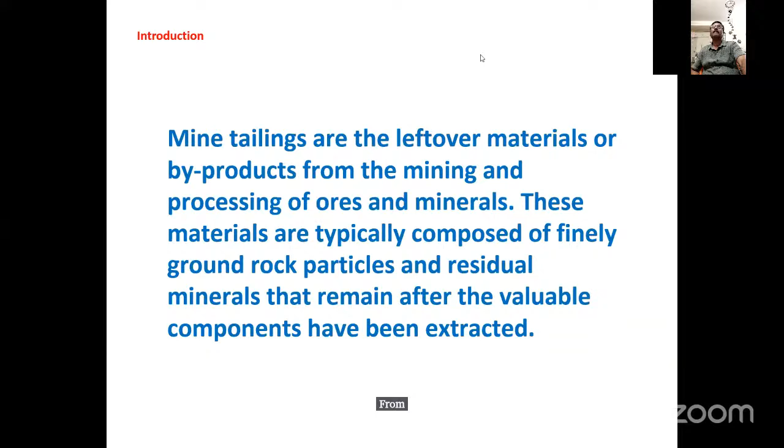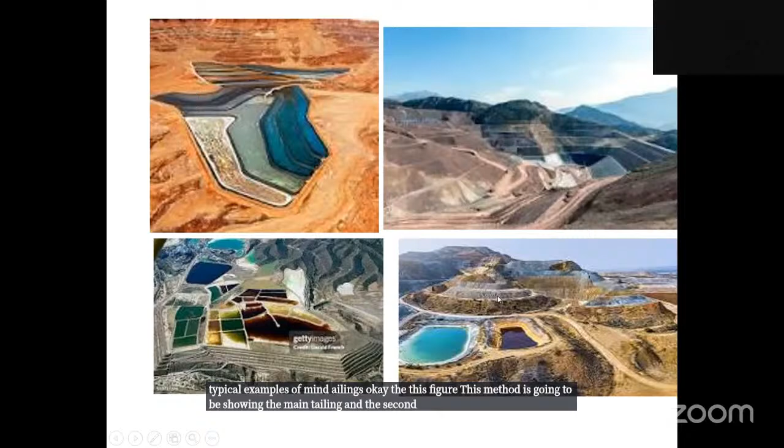Now here, what is the geotechnical importance of mine tailings? These mine tailings are once again a combination of different rocks or different soil particles. So when we are dumping this mine tailing at a particular place, we have to ensure the stability, safety, and environmental sustainability, and we have to maintain proper storage facilities. It is the duty of a geotechnical engineer.

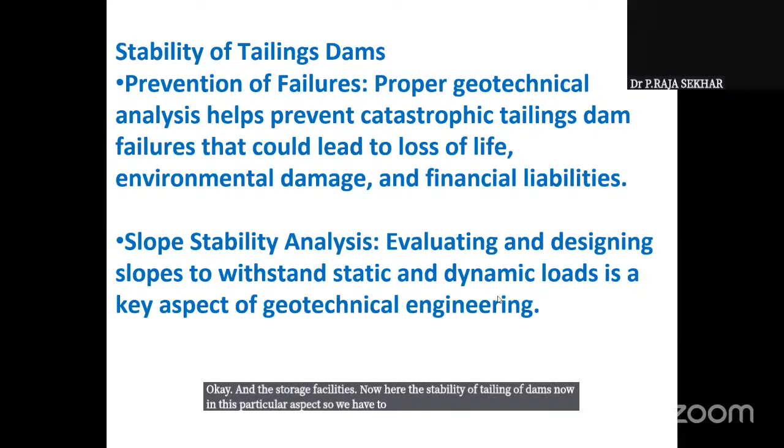So what is the duty of the geotechnical engineer? We have to ensure that the mine tailings should be stable, safe, and environmentally sustainable, with storage facilities. Now here, the stability of tailing dams. In this aspect, we have to prevent failures, analyze the slope stability, then control the seepage and drainage management. Means we have to control the pore water pressure, that is reducing pore water pressure within the tailing material, and we have to provide efficient drainage systems.

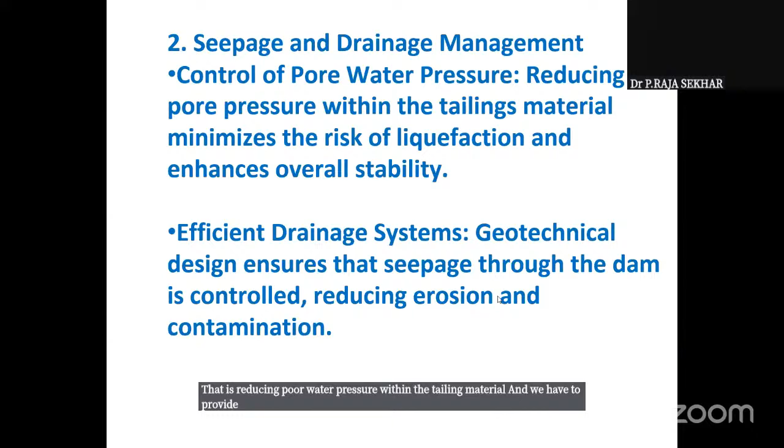And the third point, characterization of tailing material. Here the geotechnical studies evaluate the mechanical properties of tailings, which play a very important role. So what are mechanical properties in soil? They are index properties and engineering properties. Coming to index properties: water content, specific gravity of mine tailing material, and Atterberg limits. And we have to classify the tailing material, is it well graded or poorly graded, and know its density. This comes under index properties.

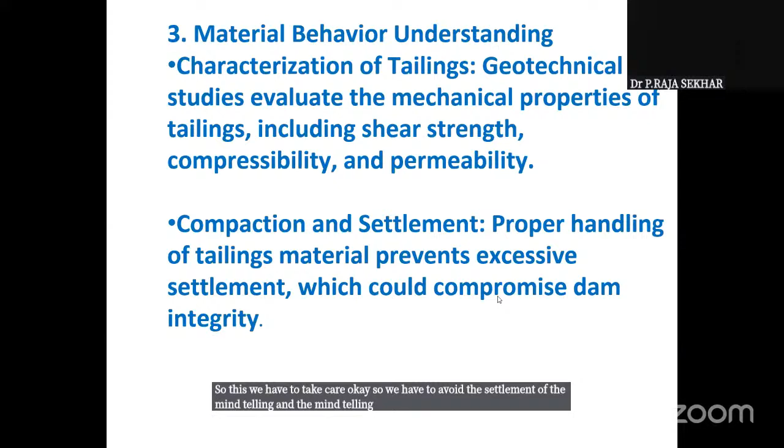And what are the engineering properties? They include shear strength, compressibility, and permeability. And one more is compaction and settlement. Proper handling of tailing material prevents excessive settlement, which could compromise the dam integrity. So this we have to take care. We have to avoid the settlement of the mine tailing, and the material should be properly compacted. And the risk mitigation, this is also very important.

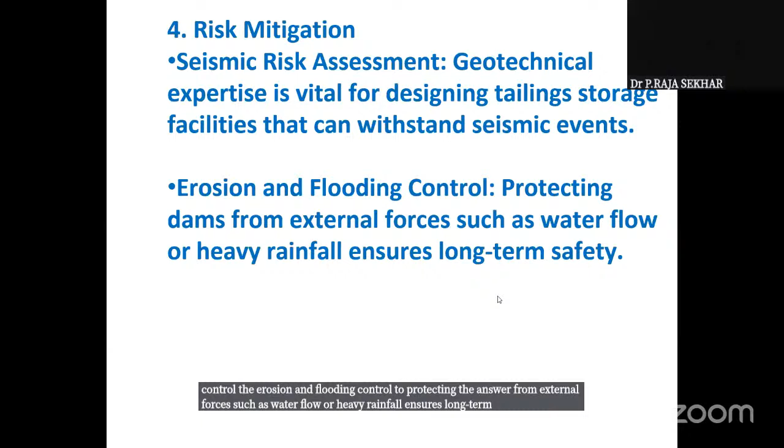Geotechnical expertise is vital for designing tailing storage facilities that can withstand seismic events. And erosion and flooding control, protecting dams from external forces such as water flow or heavy rainfall, ensures long term safety. So this comes under risk mitigation. And the main important thing is environmental protection. This will play a role in safety and stability of mine tailing material.

So what is environmental protection? Preventing contamination. What is the contamination here? The material coming out should not flow outside that particular boundary. If that material is contaminated, the entire surrounding area is going to be contaminated. So for preventing contamination, we use geotechnical barriers and liners, which can prevent leachate from polluting groundwater.

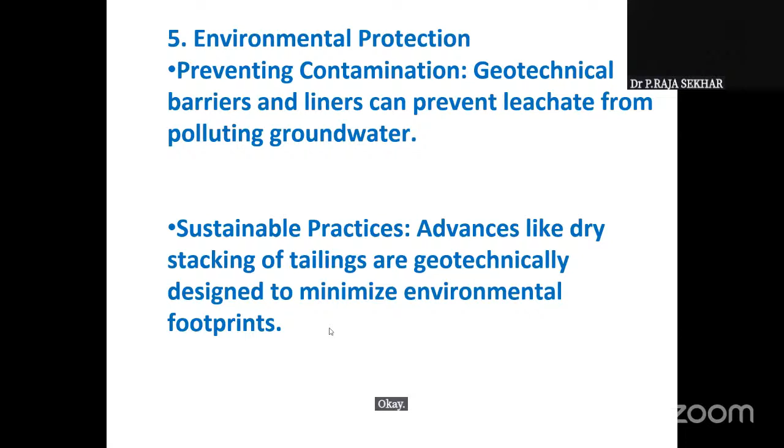And we have to follow sustainable practices, such as advances like dry stacking of tailings, which are geotechnically designed to minimize environmental footprints. This comes under environmental protection. The next point, characteristics of mine tailings. Mine tailings consist of finely ground rock and mineral waste from the extraction of metals or minerals. It is a fine ground material from the extraction of metals or minerals. They often contain residual metals, sulfides, and other chemicals used in the mining process.

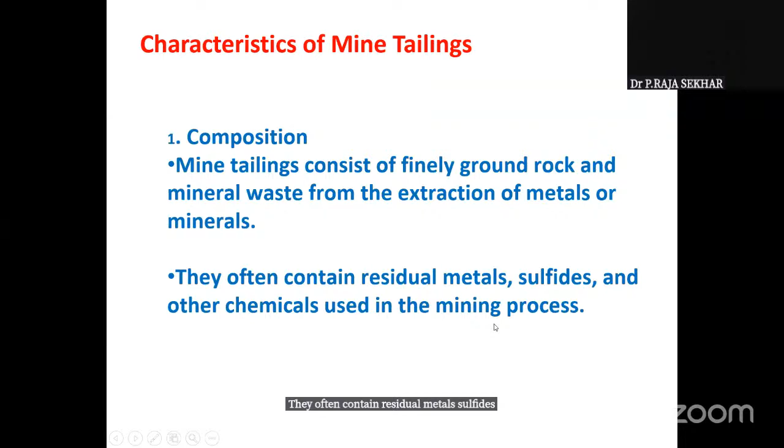Now this diagram indicates the representation of mine tailing material. There are four diagrams. The first diagram shows that we are taking some mine tailing material and keeping it in a container. In this container we can show some solids. The round shaped particles are mine tailings, and in between two round shaped particles, these are called solids.

So between two solids there is a gap. This gap is called voids. Sometimes these voids are filled with air, water, and solids. The first diagram indicates a tailing material, and the second diagram indicates a three-phase diagram.

Three-phase diagram. So the tailing material we are dividing into solids and the voids. The voids between the two solids are sometimes filled with water and air. So this is partially saturated tailing material. Coming to the third diagram, if there is heavy rain for 2-3 days, what will happen? All these voids are filled with water, so the partially saturated tailing material will convert into fully saturated material.

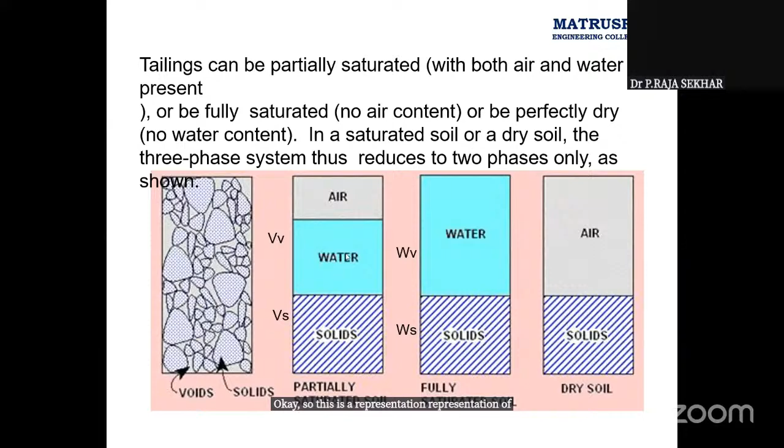Mine tailing material. The first diagram indicates we are taking the tailing material in a container, the second diagram we are separating into a three-phase diagram, the third diagram indicates all the voids are filled with water, and the fourth diagram represents the voids filled with air. So that is a dry state. It is a fully saturated state. It is a partially saturated state. So this is a representation of any material.

Before dumping or storing this mine tailing material, we have to see some index properties. The index properties are water content, specific gravity, what type of soil, the Atterberg limits, and density. One of the very important index properties is the particle size.

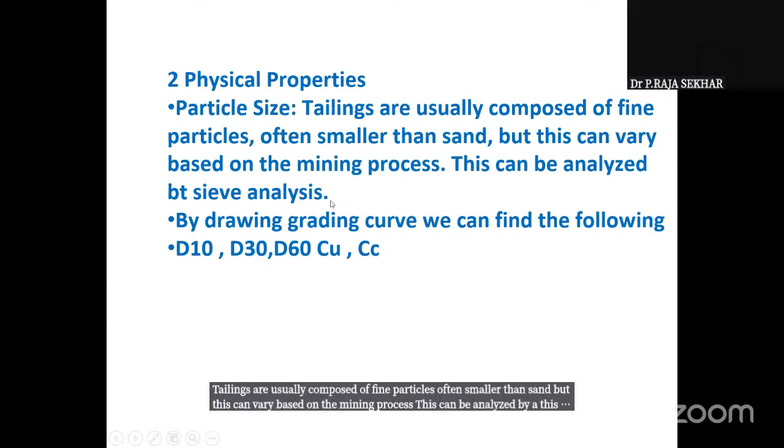Tailings are usually composed of fine particles, often smaller than sand, but this can vary based on the mining process. This can be analyzed by sieve analysis. What is sieve analysis? We take mine tailing material through different sieves, sieve it, and find the particle size and sieve size. On the x-axis we draw the particle size, and on the y-axis the percentage finer.

So we will get a curve. This curve is a grading curve, and it indicates what type of tailing material it is. If this curve is S-shaped, it is called well graded tailing material. If we get a straight line, it is called poorly graded tailing material. From this grading curve we can find D10, D30, D60.

So what is D60? D60 is the particle size at 60% finer, D30 is the diameter of the particle at 30% finer, and D10 is the diameter of the particle at 10% finer. Here the D10 is called effective size. And we calculate the uniformity coefficient, Cu, which is the ratio of D60 divided by D10.

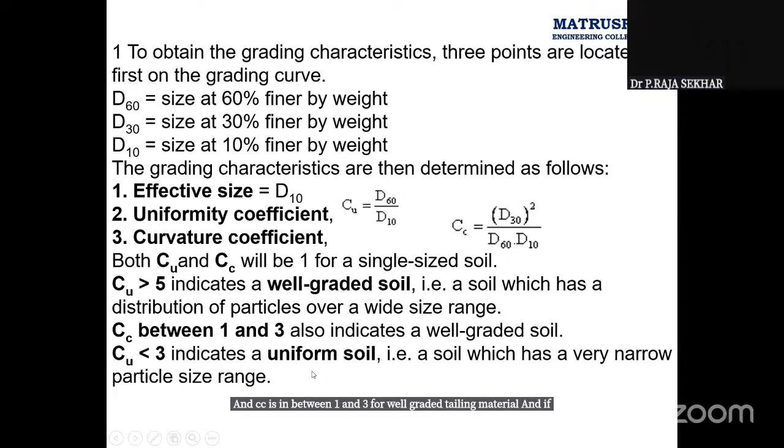If Cu is greater than 5, it indicates well graded tailing material, and Cc is in between 1 and 3 for well graded tailing material, and if Cu is less than 3 it indicates uniform tailing material. So like this we can grade. So before dumping this tailing material, we can classify what type of tailing material it is. Is it well graded or is it poorly graded material?

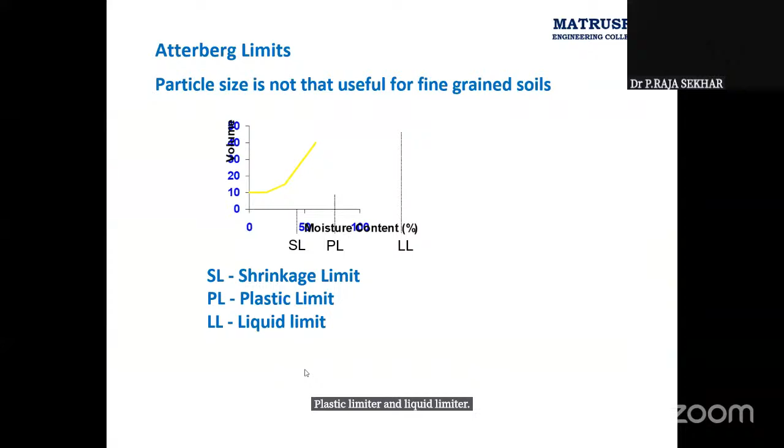Then another index property is the Atterberg limits. The Atterberg limits are nothing but shrinkage limit, plastic limit, and liquid limit. This particular diagram indicates the consistency of the tailing material. Initially the tailing material is solid. If I add some water, this solid will become semi-solid. If I add some more water, this semi-solid will become plastic. At this plastic state, we can mold the material into any shape.

Beyond this particular water content, what will happen? The plastic state will become liquid state. So these are called consistency limits or Atterberg limits of a mine tailing material. Now what is the WS? The water content between solids and semi-solids is the shrinkage limit, the water content between the semi-solid and plastic state is called plastic limit, and the water content between the plastic and liquid state is called liquid limit. So these are the consistency limits.

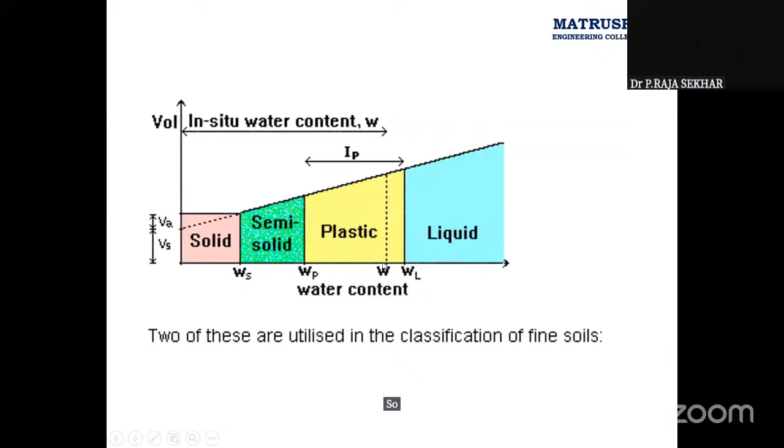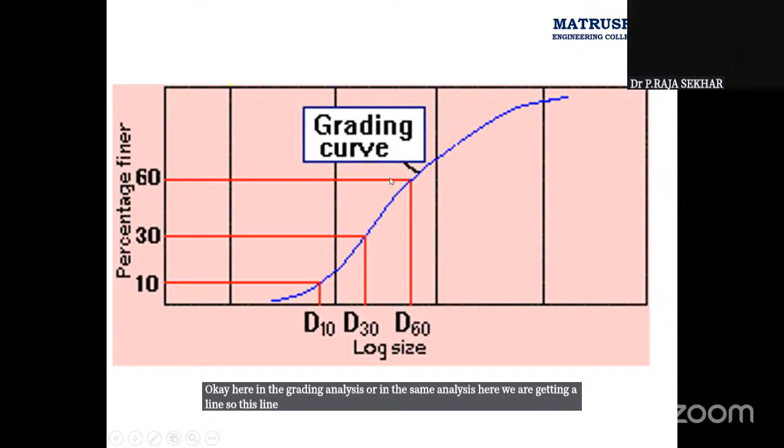And there is one line. This line is called the A line. Previously, in the grading analysis or sieve analysis, we got a line called the grading curve. Whenever we draw a graph between two variables, we get a line or curve, and every line or curve has its own name. Here the name of this line is A line. Tailing material above the A line is called clay, and below the A line, it is called silt.

In the plasticity chart, there are two vertical lines. This vertical line is at 35%, and this one is at 50%. What is the meaning? If the liquid limit is less than 35, it is indicated with the L symbol, which means low plasticity. If the liquid limit is in between 35 and 50, it is called intermediate. And if the liquid limit is more than 50, it is called high plasticity clay or high plasticity silt. So this plasticity chart is for fine grained tailing material.

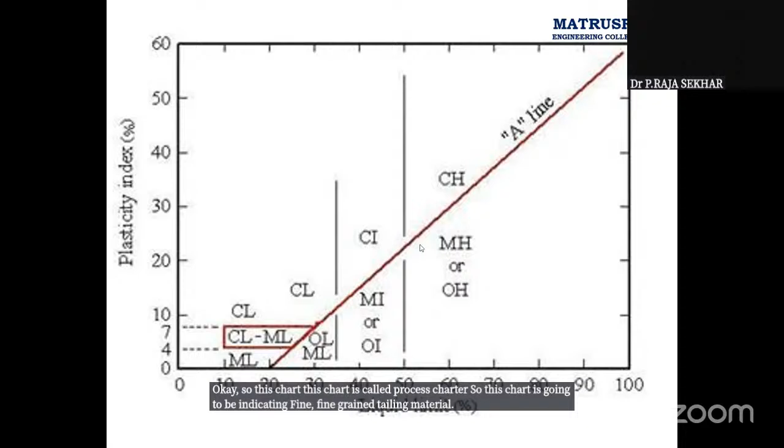Next, seepage and permeability. This is a very important concept when we are storing or dumping the tailing material. Before dumping the tailing material, we have to calculate the permeability. So what is permeability? Permeability is the property of a tailing material which permits water through its interconnecting voids.

Yes. Somebody is disturbing. Please mute.

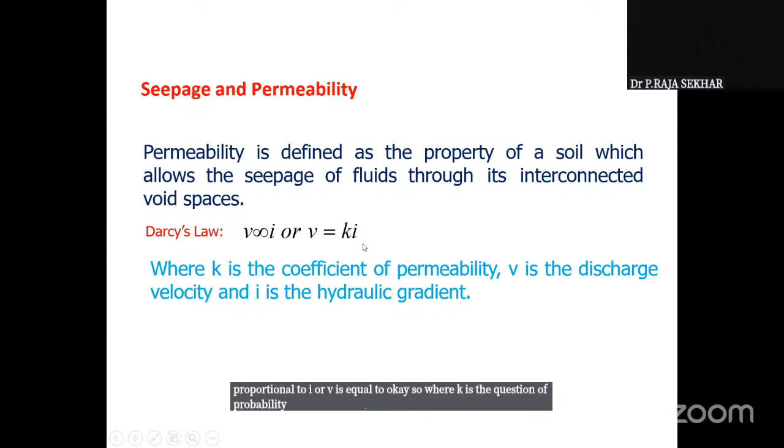Okay, so this is seepage and permeability in tailing material. If the tailing material is granular, this is the permeability. Now it is blocky, and it is a platy type of tailing material. Now what is the difference between permeability and seepage? If you see this blocky or granular material, these are the solids. In between the two solids there are voids, and these voids are sometimes filled with water and air.

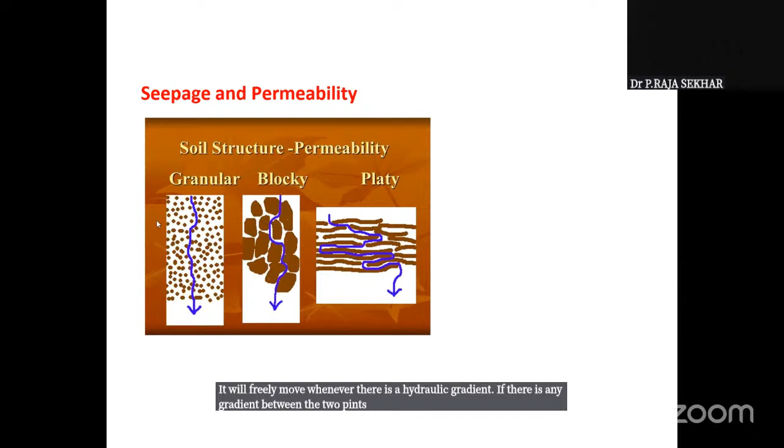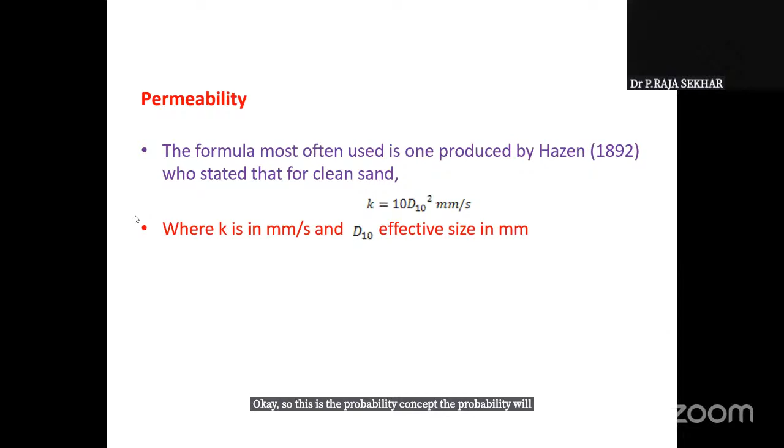When the voids are filled with water, we can classify two types of water in voids: one is held water, second is free water. The held water causes capillarity, and the free water causes seepage. Free water means it will freely move whenever there is a hydraulic gradient. If there is any gradient between two points, that water will freely move from one point to another. So this is the permeability concept. Permeability plays a very important role when we are storing the tailing material.

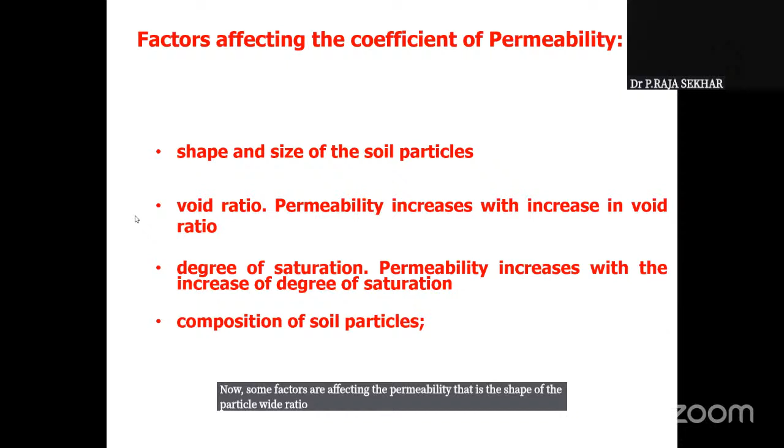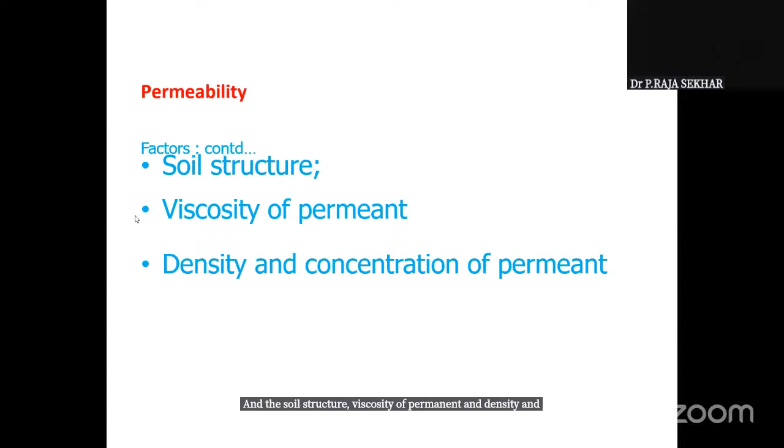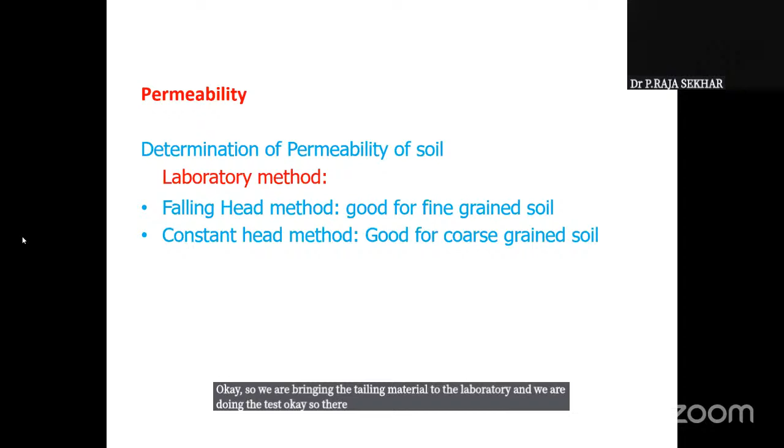Now, some factors affect the permeability: the shape of the particle, void ratio, degree of saturation, composition of soil particles, soil structure, viscosity of permeant, and density and concentration of permeant. One more interesting topic is how to calculate this permeability. It is calculated with the falling head method and the constant head method. We bring the tailing material to the laboratory and do the test. So there are two methods: one is the falling head method, second is the constant head method.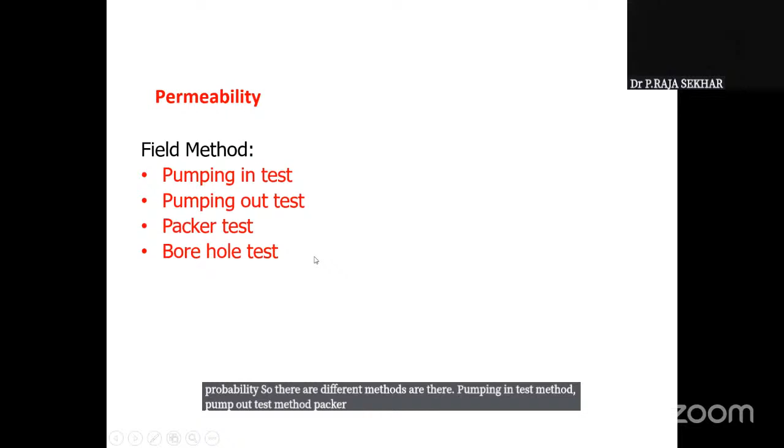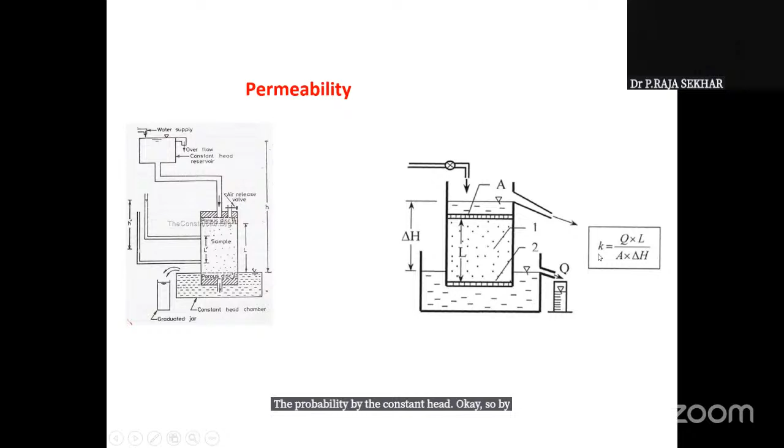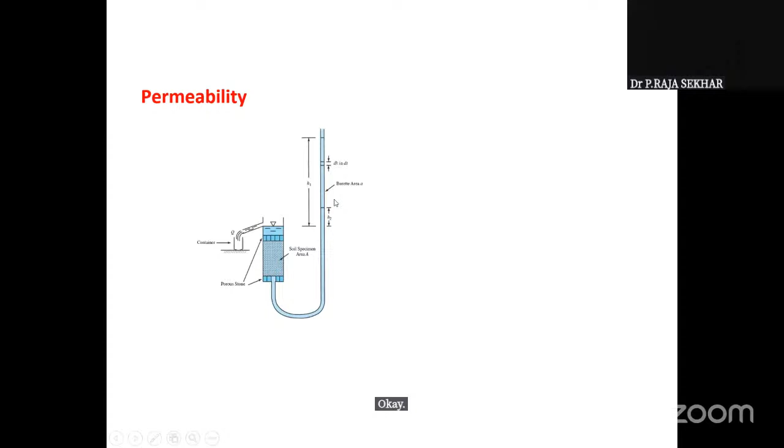In the field also we can measure the permeability. There are different methods: pumping in test, pump out test, packer test, and borehole test method. This diagram indicates the permeability by constant head, where K is equal to QL divided by A delta H. Now this is another method, the variable head method, and here is the formula: K is equal to 2.3 aL divided by At into log H1 divided by H2.

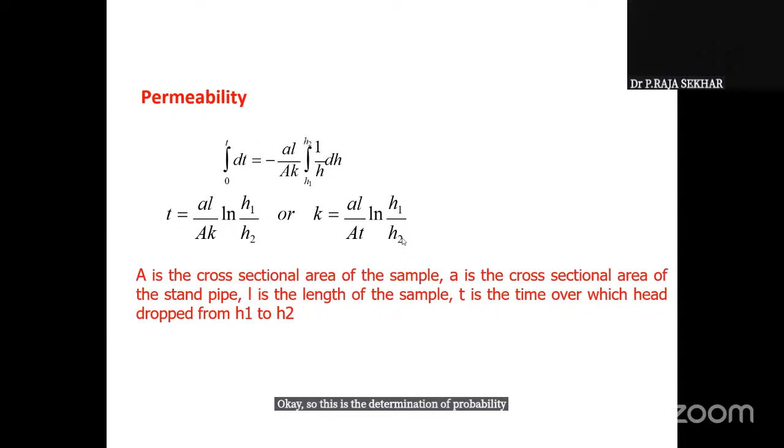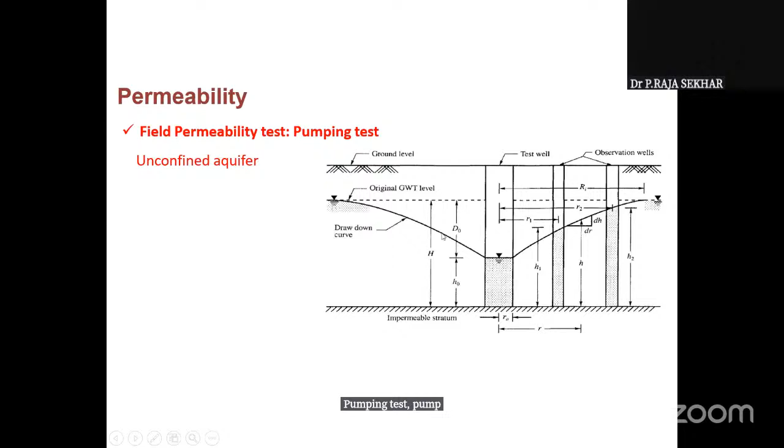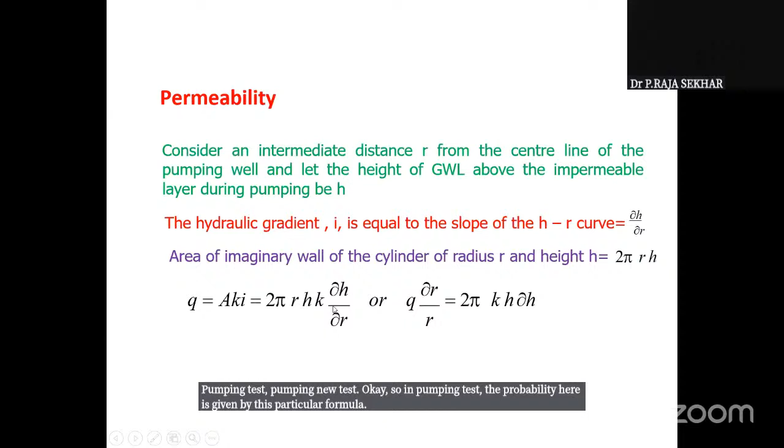So this is the determination of permeability in the lab and in the field. In the field, we can determine the permeability by pumping test, where the permeability is given by this formula. Next, if there is more than one layer of tailing materials, it is called stratified soil. In stratified soil, let us take n different layers, h1, h2, h3 up to hn, with permeability k1 in h1, k2 in h2, and kn in the last layer hn.

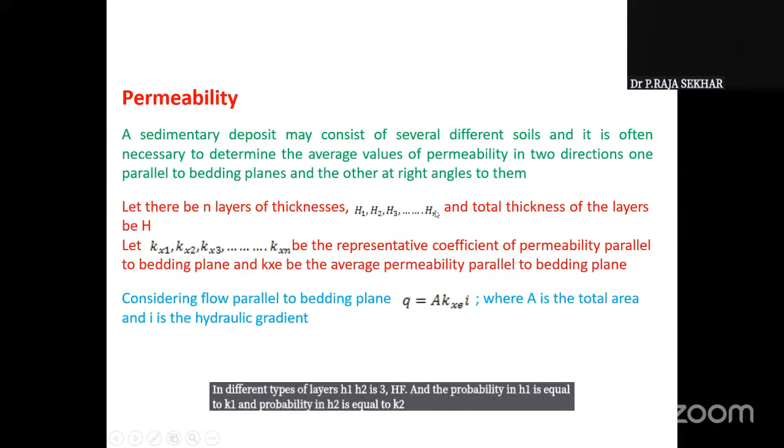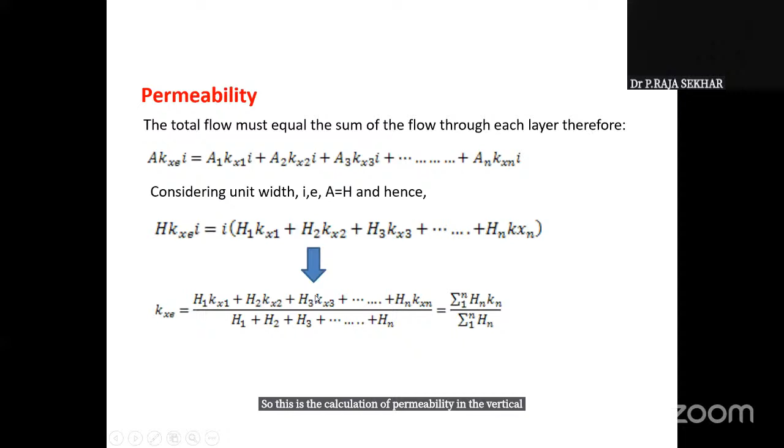And how to calculate the permeability in the vertical direction? This is the calculation of permeability in the horizontal direction, and using this formula we calculate the permeability in the horizontal direction. So this is the main concept of permeability: what it is and how to determine it. Permeability plays a crucial role when we use this tailing material in an embankment or in an earthen dam.

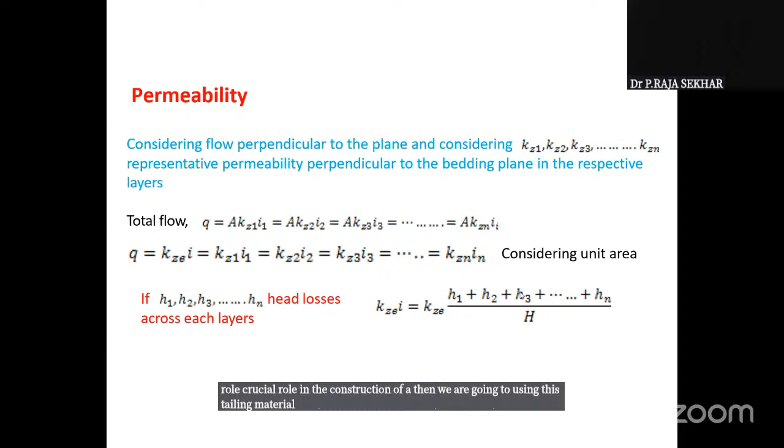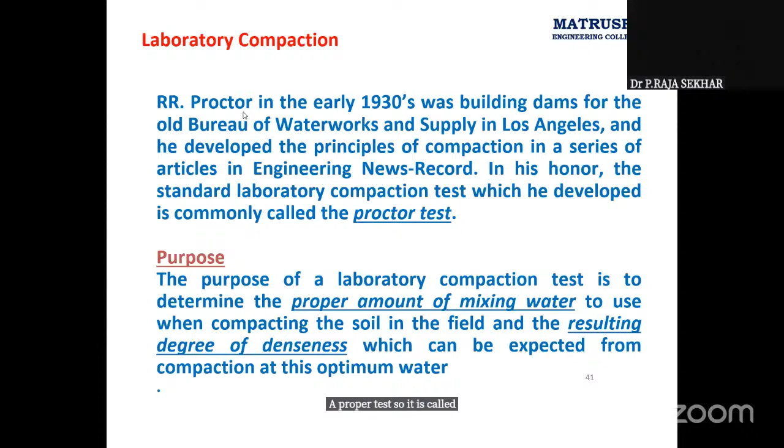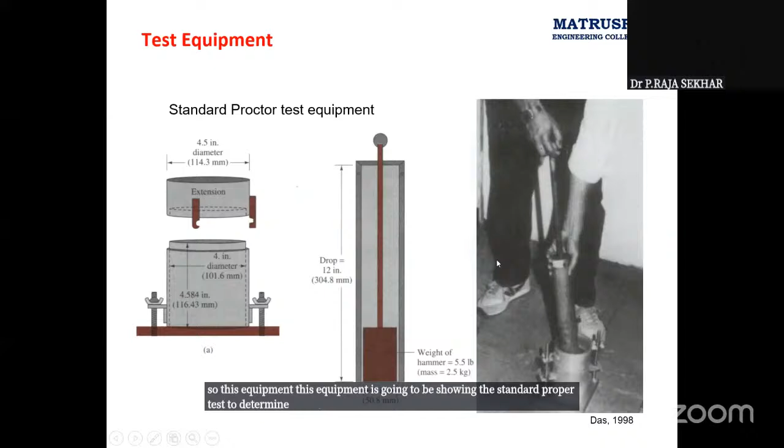So this equipment is going to be showing the standard Proctor test to determine the optimum moisture content and dry density. Now here I will show a curve. After compaction, we are going to be getting this curve. This curve is nothing but the compaction curve. Here the peak point is going to be indicating the maximum dry density, and the corresponding water content is

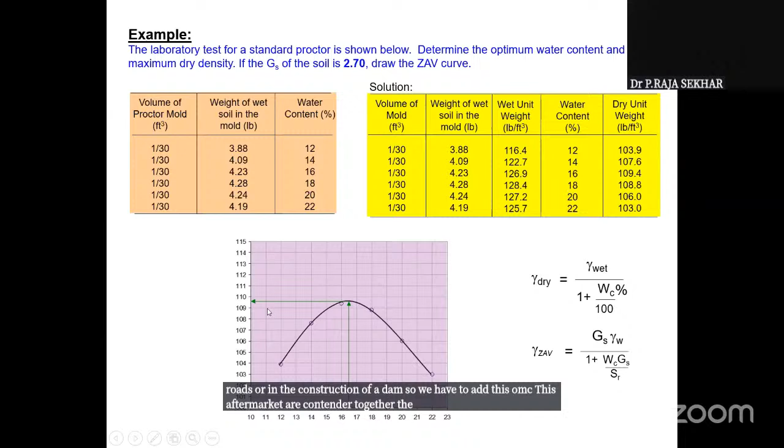called optimum moisture content. So whenever we want to use this tailing material in the construction of roads or in the construction of a dam, we have to add this OMC, this optimum moisture content, to get the maximum dry density. Now this particular diagram is clearly indicating the compaction curve of a tailing material.

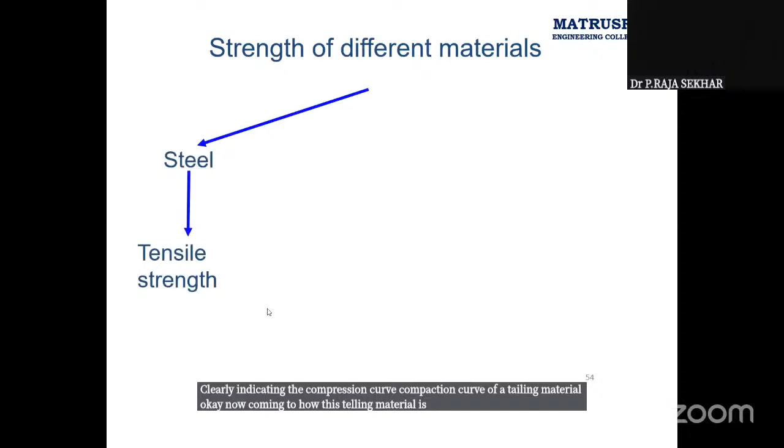Now coming to how this tailing material is getting strength. There is a very important concept here: the strength of different materials. Every material has its own strength. Generally, in the construction of civil engineering structures, we use steel, concrete, and soil or tailing material. Now what is the steel? The steel is very strong in tension, and the steel gets its strength due to tensile strength.

Coming to concrete, the concrete is very strong in compression, so the concrete gets its strength due to compressive strength. But what about tailing material? The tailing material is a complex material, but it is very strong in shear. That is nothing but shear strength. But here we have to avoid the pore water pressure. Due to the presence of pore water pressure, the tailing material or soil material will show a complex behavior.

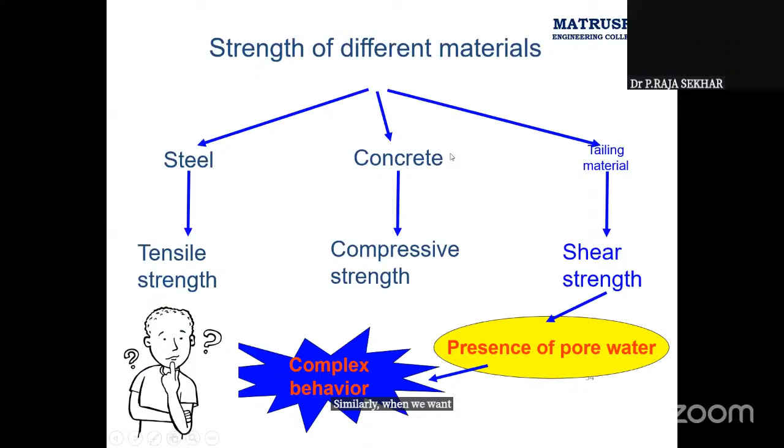Now, how to calculate the strength of any material? Let us take steel. We purchase steel according to its grade, Fe 415 or Fe 500. Fe is nothing but ferrous, and 415 or 500 indicates its strength. Similarly, when we want to mix a concrete, we go for a mix design, M15, M20, M30. What is the M? M is nothing but mix, and the number indicates the strength.

Similarly, coming to shear strength, here we have to find out the shear parameters, that is nothing but c and phi, and the shear parameters will give the bearing capacity of that particular tailing material or soil. Steel gives tensile strength in the form of Fe 415 or Fe 500. Concrete gives its strength in the form of mix design M15, M20, M30. Similarly, the tailing material gets strength due to c and phi, cohesion and friction, which play a very important role in the calculation of bearing capacity.

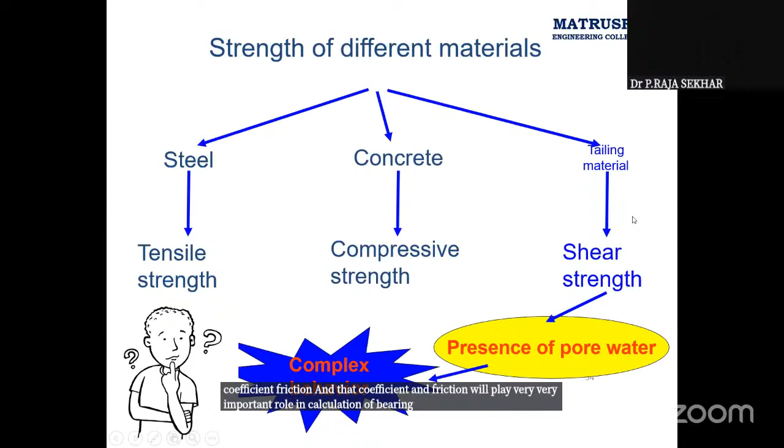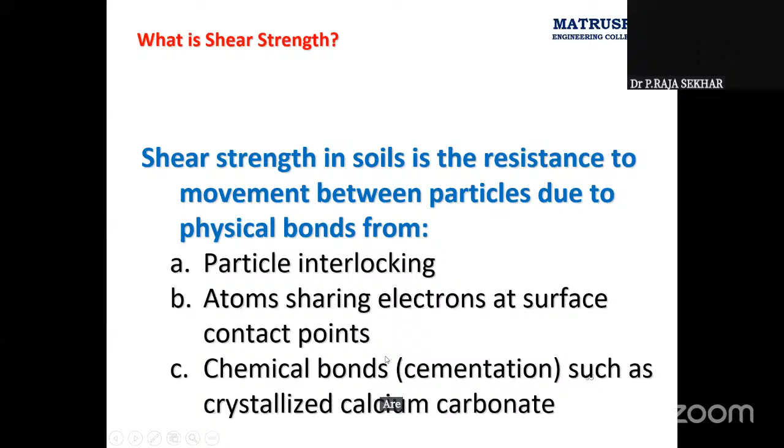Now, what is the shear strength? Shear strength is the resistance to movement between the particles due to physical bonds from particle interlocking, atoms sharing electrons at the surface contact points, or chemical bonds. Now, how will this tailing material fail? The tailing material will fail in shear.

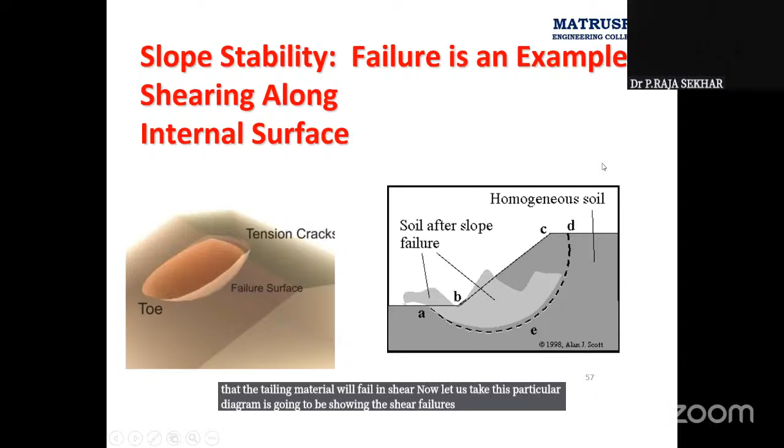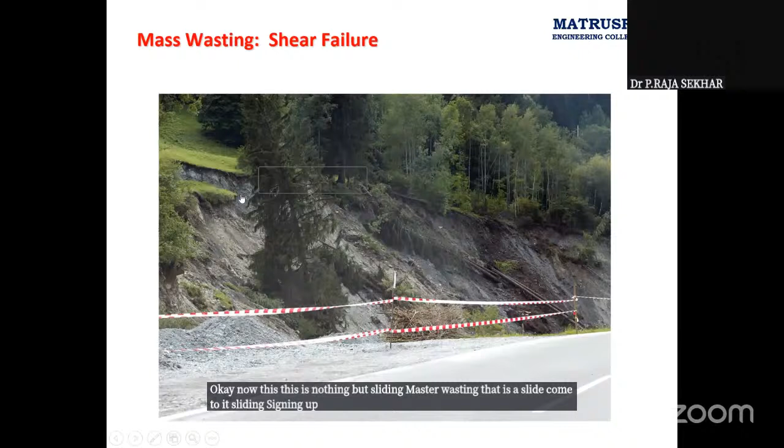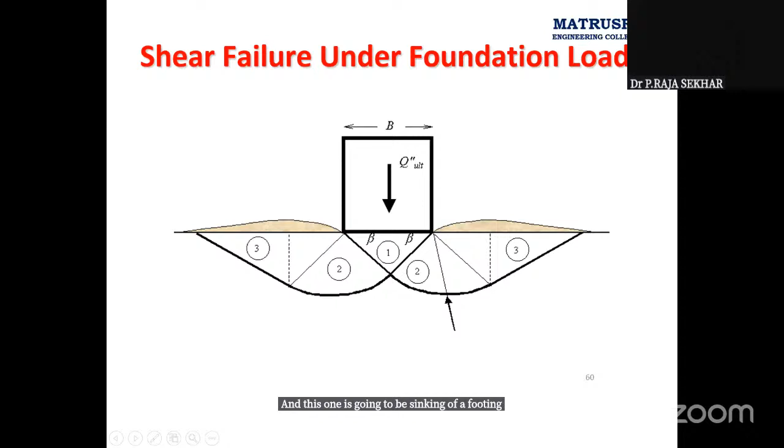This diagram is showing the shear failures of a tailing material. This is a sliding mass wasting, that is, complete sliding of an embankment or a slope due to shear failure. And this one is the sinking of a footing, that is a shear failure under a foundation. See here, this is the sinking of a footing, how this material is failing.

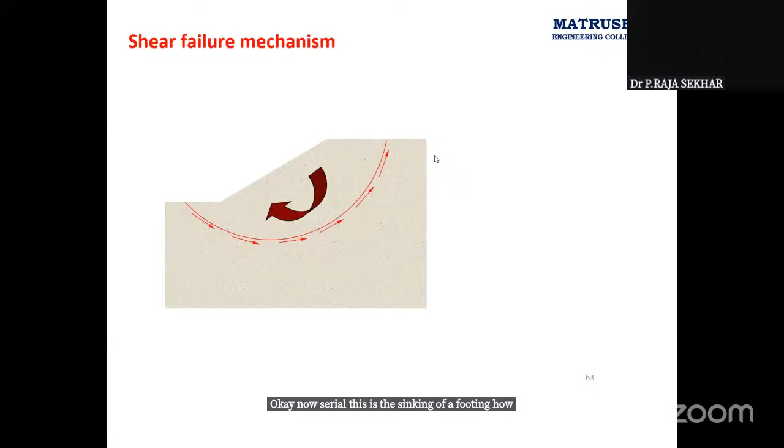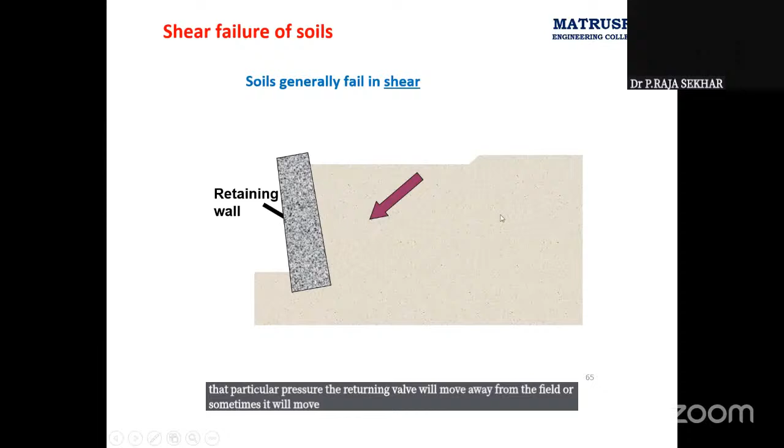Now one more failure is a retaining wall. What is the retaining wall? A retaining wall retains a material, and this material exerts a pressure. Due to that pressure, the retaining wall will move away from the fill, or sometimes it will move towards the fill. At the time of failure, the failure surface develops, and there will be a mobilized shear resistance.

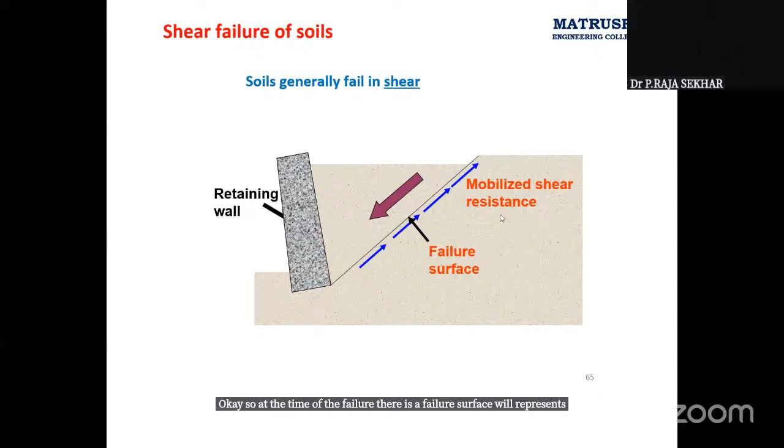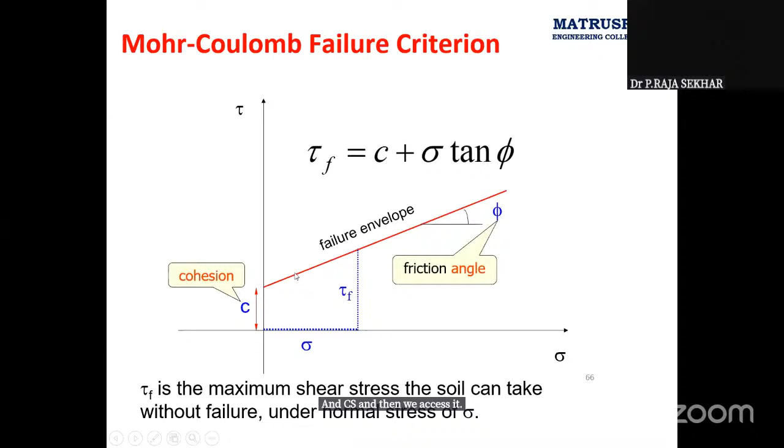And how we are going to be getting this failure criteria in a tailing material: using a Mohr-Coulomb failure criteria. The Mohr-Coulomb failure criteria is given by tau is equal to C plus sigma tan phi. Okay. And here what is the tau? Tau is nothing but shear strength, C is cohesion, and sigma is normal stress. So here we are drawing normal stress on the x-axis and shear strength on the y-axis. If now we are getting a line, this line is called the failure envelope or strength envelope.

Now there are different types of strength envelopes we are getting. If the strength envelope is passing through the origin, it is called cohesionless soil. And if it is parallel to the x-axis, it is called cohesive soil. If this line intersects the y-axis at a particular point, this is called the general case, that is the C-phi soils. Okay. The Mohr-Coulomb failure criteria will give the strength envelope for cohesive soil, cohesionless soil, and C-phi soils.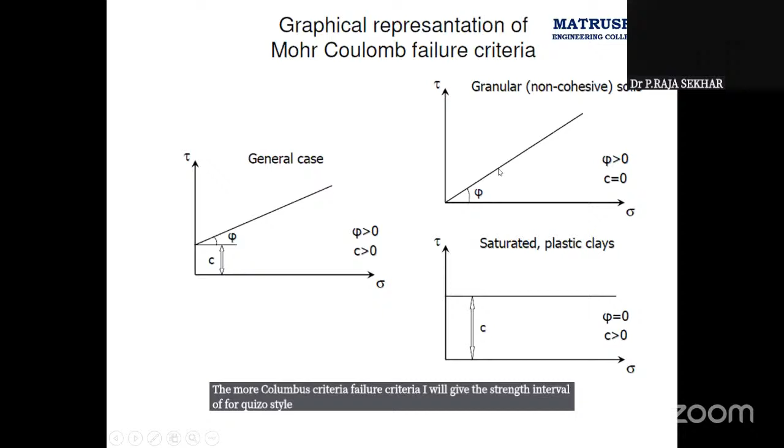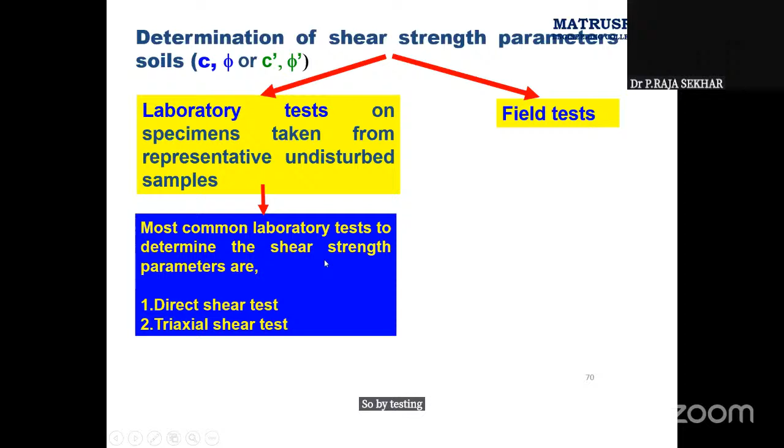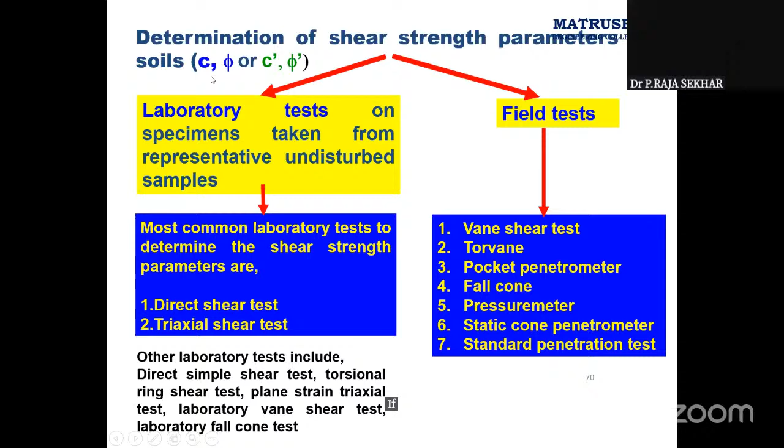Now, the determination of shear parameters is very important. So, how are we going to determine these shear parameters? By testing the tailing material in a lab with the help of a direct shear test or triaxial shear test. And in the field also, we can test by vane shear test, Torvane test, pocket penetrometer, fall cone test, pressure meter, static cone penetration test, and standard penetration test. Using these tests, we can calculate C and phi. If I know the C and phi of any material, I can calculate the bearing capacity.

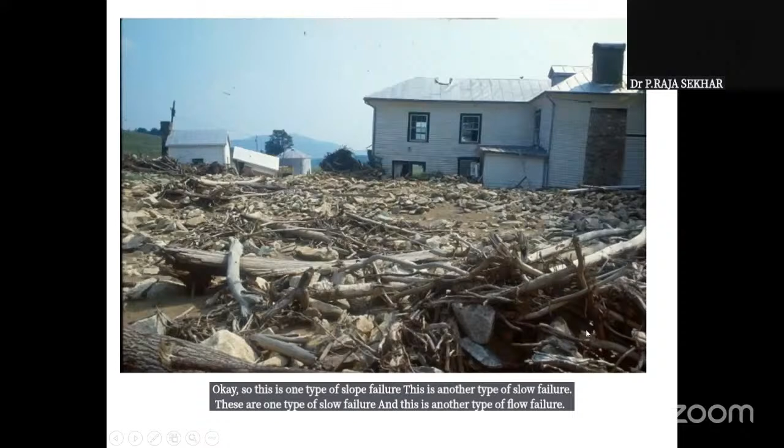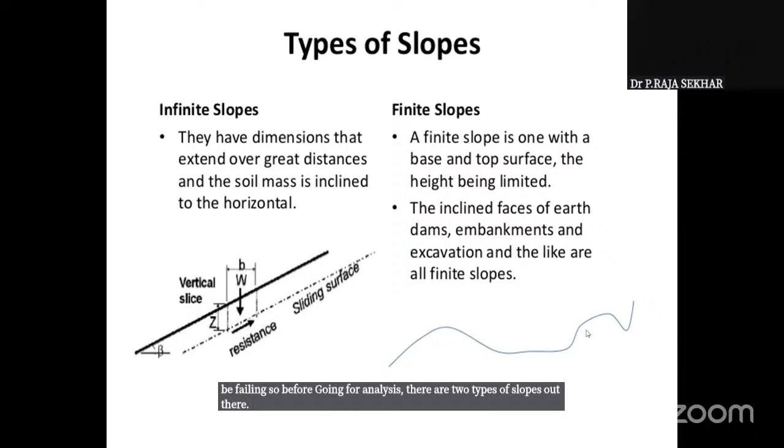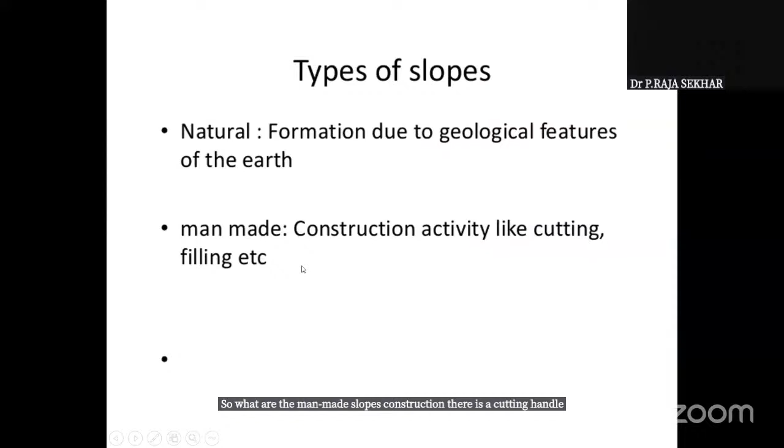Now these are some failure mechanisms, slope sliding mechanisms. This is one type of slope failure, this is another type, and this is also slope failure. Now, how is this slope going to fail? Before going for analysis, there are two types of slopes: one is a finite slope, the second is an infinite slope. If the slope is formed by nature, it is called a natural slope. If the slope is made by man, it is called man-made. Man-made slopes are construction, that is cutting and filling, embankments, or earthen dams.

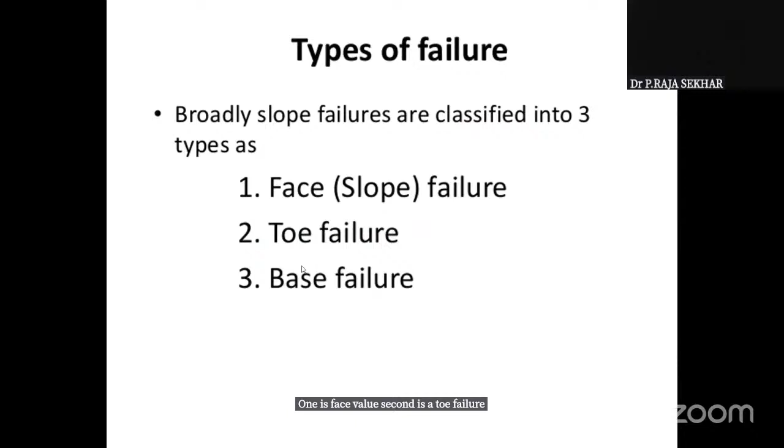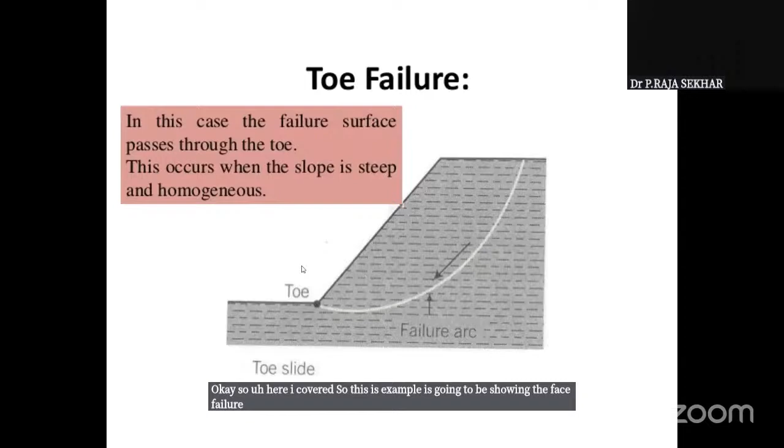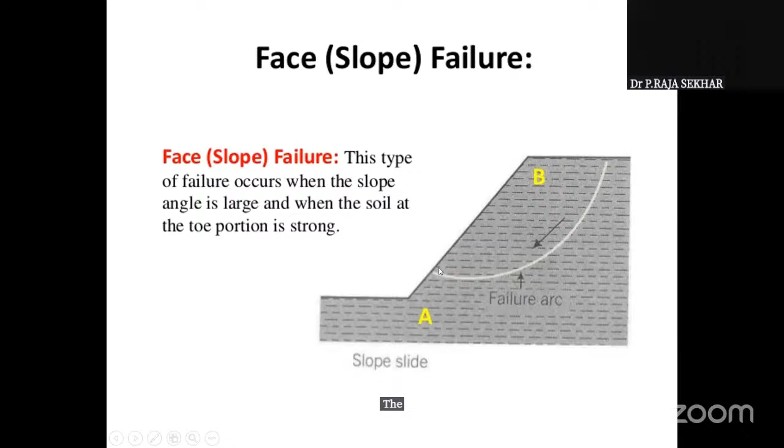Now the types of failure. There are three types of slope failures: one is face failure, second is toe failure, and the third is base failure. This example is showing the face failure and toe failure. Toe failure means the failure starts from the toe. Face failure means the failure starts from above the toe. And one more failure is base failure.

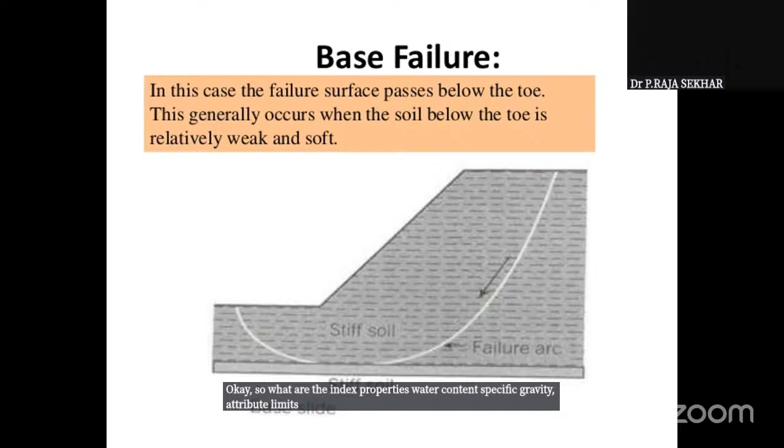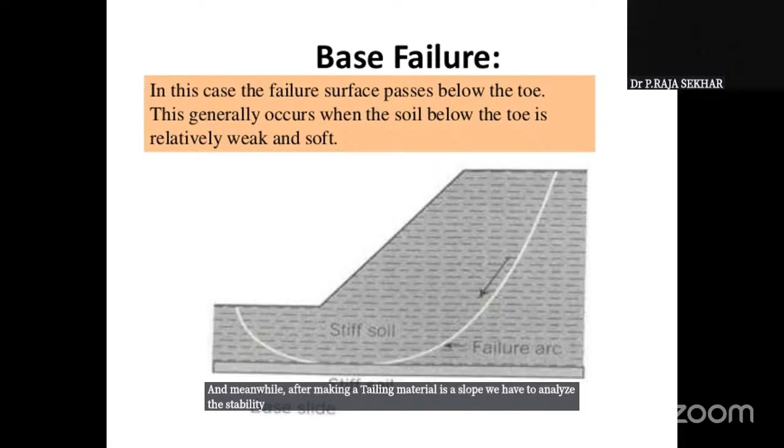Okay, so till now what I covered: what is the tailing material, and when we are storing the tailing material, we have to know the mechanical properties. The mechanical properties are index properties and engineering properties. Index properties are water content, specific gravity, Atterberg limits, and density. The engineering properties are permeability and shear strength. And after making the tailing material into a slope, we have to analyze the stability of the slope. These points we have to remember when storing any tailing material.